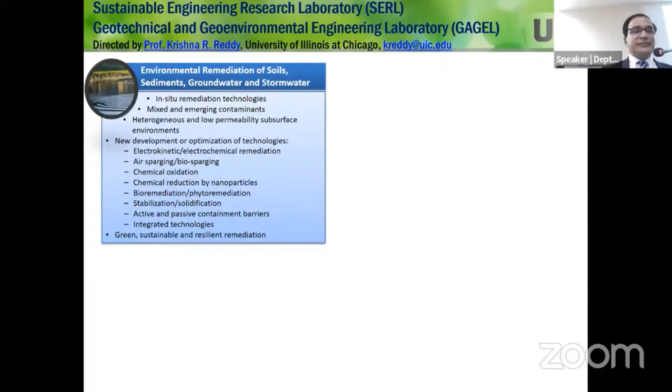So I am in charge of two labs: the Sustainable Engineering Research Lab and the Geotechnical and Geoenvironmental Engineering Lab. Just to give you an idea about the types of research I do - I do a lot of research on environmental remediation of soils, sediments, groundwater, and stormwater, developing technologies to address pollution. I also work on waste management and landfill engineering, which is the topic of my presentation today, along with many specific research questions I answer through my research. For the last several years, I've been working on life cycle assessment and sustainable and resilient engineering. In this area, I'm more interested in developing sustainability analytics. Everybody talks about sustainability these days, whether they understand what it means or not - it has become a buzzword, but my research is about quantifying sustainability. How do you quantify it? If you say your system is sustainable, how do you say that? How can I calculate the sustainability metrics and then show that?

Not only sustainability, but resiliency has become very important, and you need to think about both of them. Resiliency, especially to climate change impacts, is extremely important. So having the frameworks, once you have them, you can apply them to anything you're doing. It doesn't have to be geotechnical or geoenvironmental. It can be structural engineering, water resources, anything.

I teach a course on sustainable engineering for graduate students, and I have students from electrical engineering, chemical engineering. They come and take the course. They learn the sustainability principles, metrics, and tools, and apply them to their designs. For example, last semester one project an electrical engineer did was substation design - how do you make a more sustainable substation design?

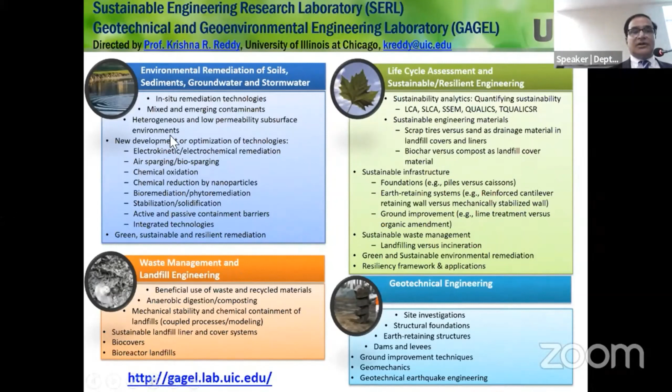My master's and PhD were in geotechnical engineering, and my undergraduate is in civil engineering. These first two topics you see, I call geoenvironmental, and this is more sustainability. I'm passionate about geoenvironmental engineering as a topic. It's not used very commonly. It's, you could say, an easy way - a combination of geotechnical and environmental.

You need to bring both of them together. But if you think broadly, it is much more than just geotechnical and environmental. You need a background in chemistry, hydrogeology, microbiology, some medical knowledge, environmental justice, economic issues, looking at the systems engineering approach, and environmental laws.

We address all these issues: environmental characterization, risk assessment, containment, remediation, waste management. To address these environmental issues, having a geotechnical background alone or environmental engineering background alone is not enough. You need to encompass all these multidisciplinary things. So I would say geoenvironmental engineering is the application of all relevant multidisciplinary background to create holistic engineering solutions - that's the problem we see. People work in their silos and aren't able to come up with a holistic solution to the problem, so the problems aren't being solved.

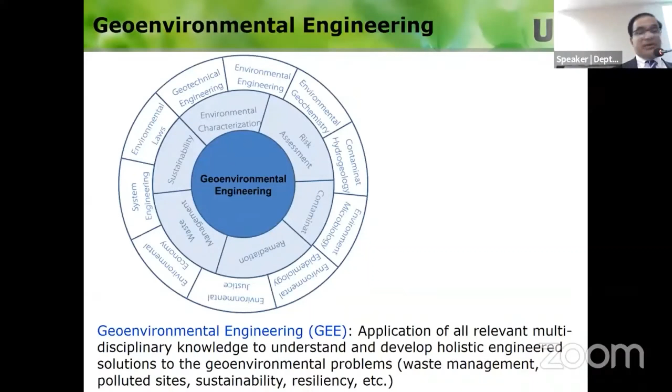Geoenvironmental problems are basically waste management, polluted sites, sustainability, and resiliency. This is a truly multidisciplinary technical approach. I really enjoy working on this one because it has a huge practical impact.

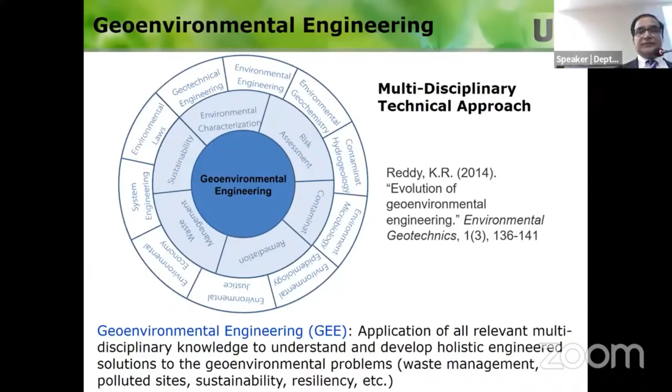If you want to know more about this field, you can read my paper. Over the last 25 years, we have been working on a lot of different aspects of sustainability and geoenvironmental engineering. We have 4 books, many journal papers, many conference papers. If you want to get into details, you can go to this website and find the information about these publications.

I want to take this opportunity in presentations to explain my research philosophy. This is very important. What we do is identify a real world problem - we really identify what problem we're facing in society. Then we come up with a research hypothesis: what could be the potential solution to the problem? And then we want to test it out, right? That's the scientific approach.

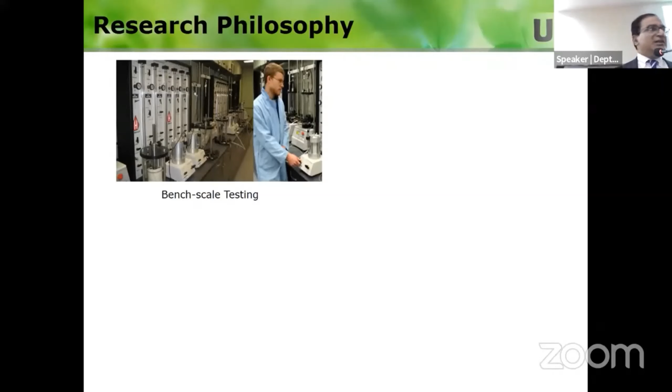So we do bench scale experiments. These are very easy, not time consuming, not expensive. We do that one. And if we find positive results, then we scale up. Everything is not tiny in experiments, right, so you need to scale up, and we do that in our labs.

Mathematical modeling is extremely important because once you do these experiments, you can understand the fundamental processes that you need to be modeling, and then incorporate all those processes into a mathematical model. Then you can scale up with the modeling to the field scenario. You cannot apply it directly from lab to field - you need a mathematical model to be able to design the field systems.

I also love going to the field and demonstrating or testing our hypothesis, what we found in the lab, because anything that works in the lab, even at large scale, may not work in the field. So if it doesn't work in the lab, you don't need to go to the field - you don't have to spend the time. But if it works in the lab, then you want to go out and see if it works in the field or not.

I love working with the students - these are all pictures with my students. The concept I have is, we are in the university, we need to advance the fundamentals. Practitioners aren't interested in that; they're really trying to implement solutions to the problem. So we advance the fundamentals, and at the same time, we're trying to solve the real world problems.

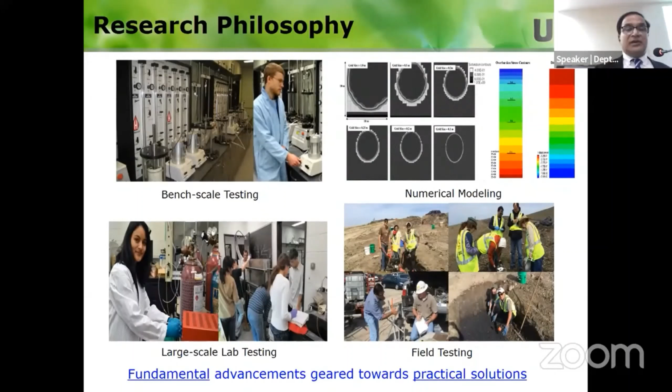So that has been my motivation for doing any project that I do. So the students get excited that we are trying to solve a real world problem, and then we need to do that on a fundamental basis.

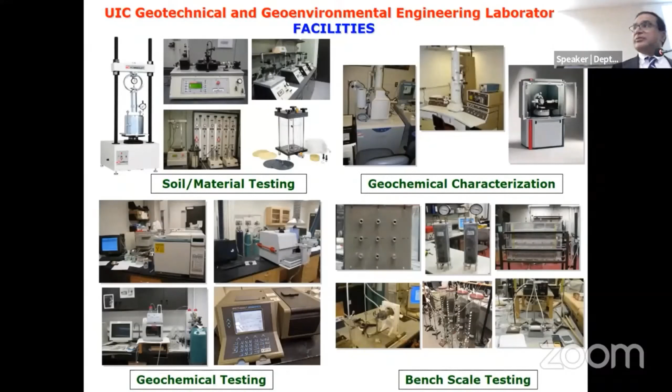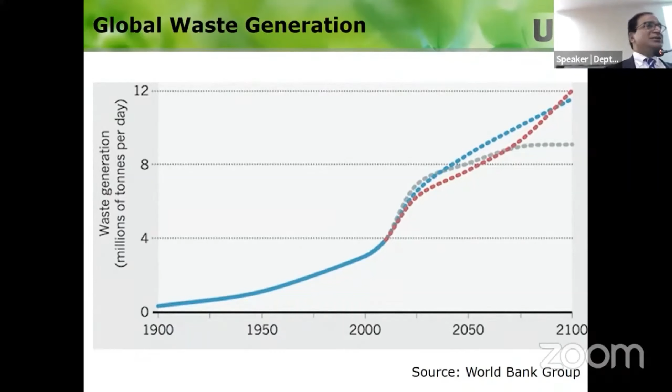If you say that we have all this waste dumps problem, then think about what we're going to do when the waste is doubled and tripled. And it's not just in India; all over the world, the quantities of waste are increasing. The simple reason is population increase. The population is increasing everywhere, and as a result, the waste per capita is increasing. So this is going to be a huge problem as we go into the future.

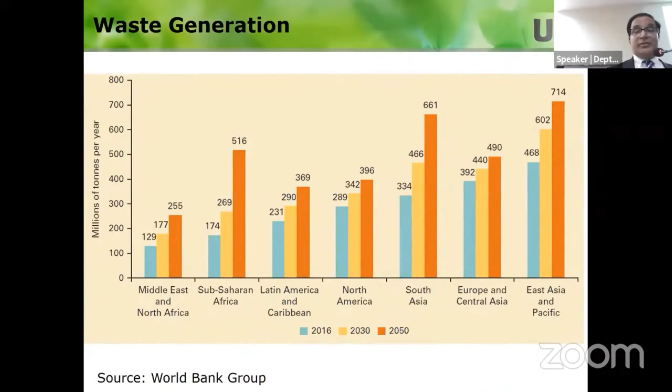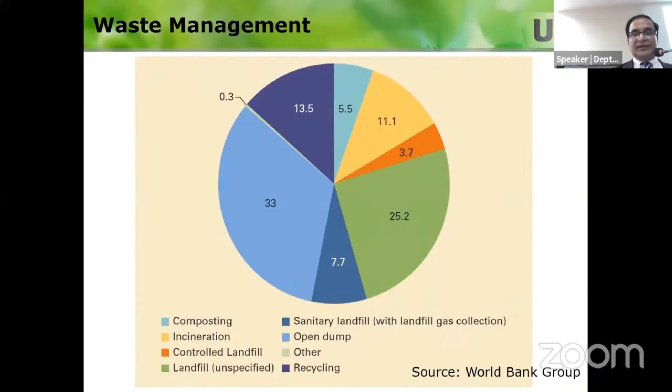Globally, if you're looking at World Bank information, composting is done, incineration is done, controlled landfilling is done, but a lot is in open dumps and some recycling is going on. But most of the waste is being dumped in open dumps or uncontrolled landfills that are not operated properly. They call them landfills, but they are actually not landfills.

So all the countries have realized that this is a huge problem. You have environmental agencies. In the US, we have the US Environmental Protection Agency. They are after protecting the environment and are supported by taxpayers' money. They have guidance on what needs to be done in terms of regulations and also enforcement activities.

In India, you have the Central Pollution Control Board. I always tell people that the first thing you need to look at is what regulations are being proposed. And unfortunately, the regulations are there and practice is different.

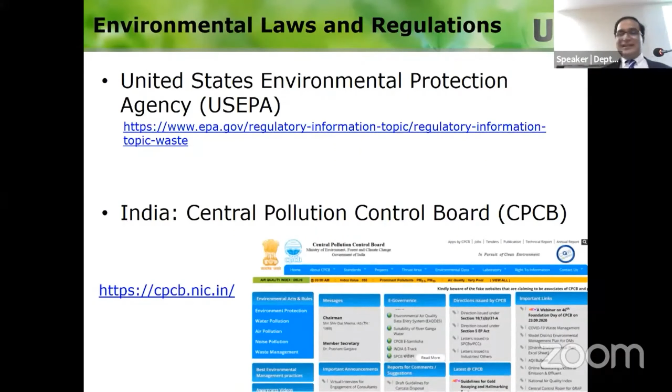So you need to understand all these things. Even though I may be working on landfills, you need to think about what are all the other things that can be done. So at the end, I want to come to this conclusion that one thing is not going to solve the problem. You need to have a combination of these things. So that's the message I'm going to end up with. Okay. So the problem is, people are looking at, okay, this one solution or one approach is going to solve the problem. That is not the case.

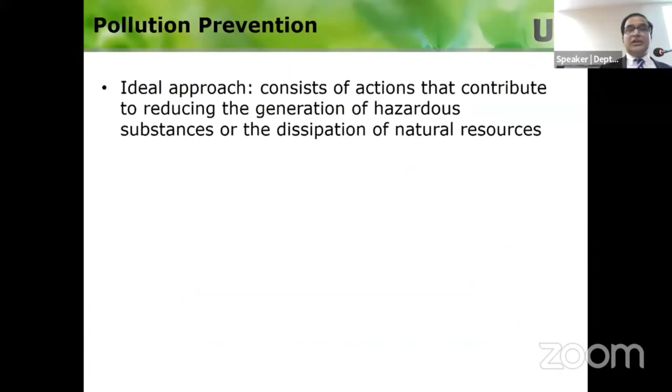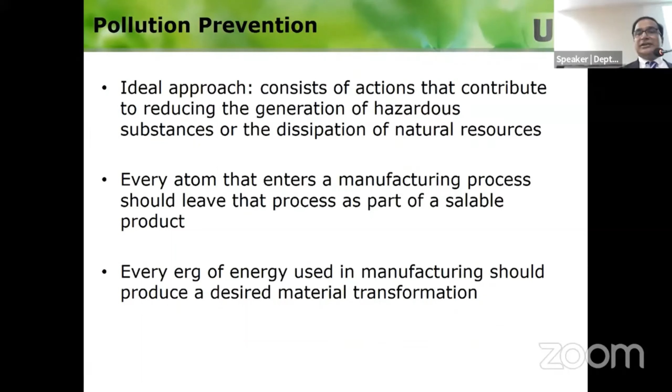So pollution prevention is, first of all, you don't want to create the waste, right? Basically, how do you prevent creation of the waste? So you have to look into the manufacturing, what materials and what processes you are using, so that you're not really generating the waste. There are a lot of things that you can do, from an environmental point of view, or also from a sustainability point of view, using less reagents, less toxic chemicals, minimizing the energy use, using a lot of renewable materials and so forth.

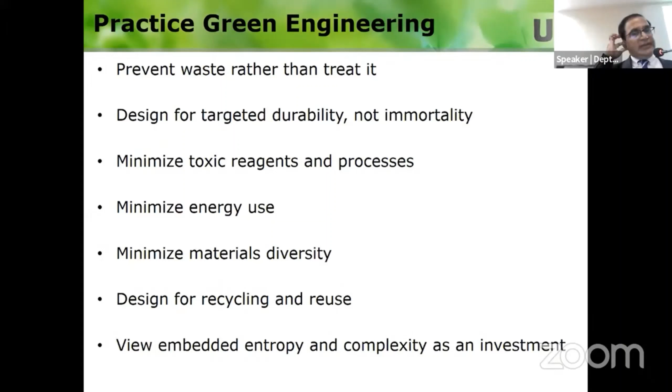So this is practicing green chemistry, using materials that are green. And then there's a green engineering concept. Sustainability is beyond green engineering, but in green engineering, you try to do these best management practices so that you don't generate the waste. So that's the one thing. And this requires thinking. You have a process to follow right now, but what are the alternative processes that you can think about? So that kind of awareness should come.

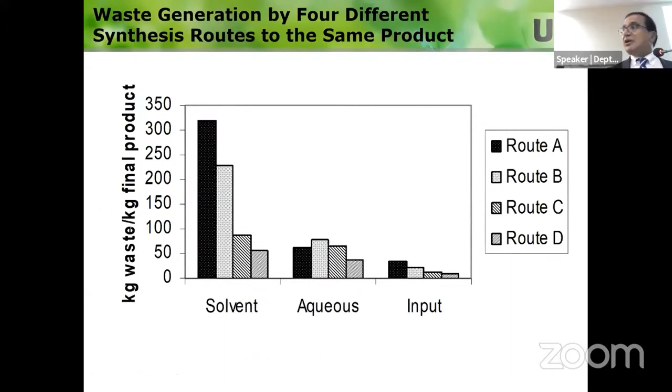So, how much solvents I'm using in a process, how much aqueous solutions, how much input I have, and then how much waste I'm generating. So these are 4 different processes that I can follow to create the same product, but you want to use the one that is going to produce the less impact. So this has to come from the manufacturers.

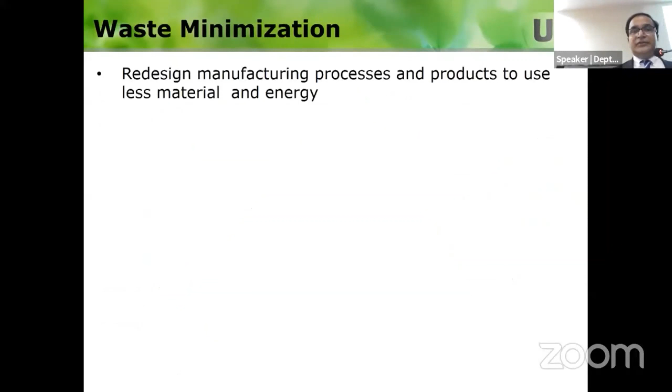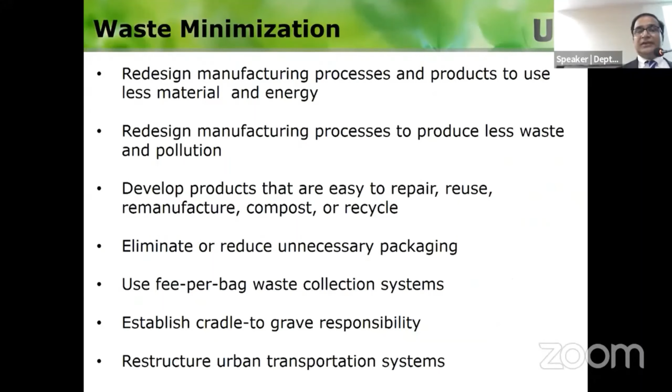So now move to minimization, right? If you cannot prevent it, try to minimize as much as possible. Again, this falls into the hands of the industry that manufactures a lot of these products, and they need to do a lot of things in terms of redesigning their processes so that the waste is minimized. So if you cannot prevent it, minimize it. If you cannot minimize it, then at least the waste that you generate, can you reuse it? And this is where a lot of efforts are being done. So you reuse, clean, and use the materials over and over again.

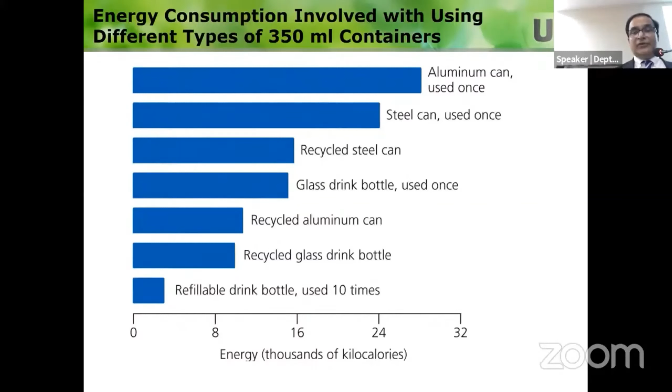So what are the advantages of this? For example, if you have an aluminum can, right? To make that aluminum can, you have to use so much energy. So if you recycle, you are conserving that energy, right? It's obviously a very simple concept. With all the materials, when you recycle, you are avoiding the energy to make them new instead of recycling.

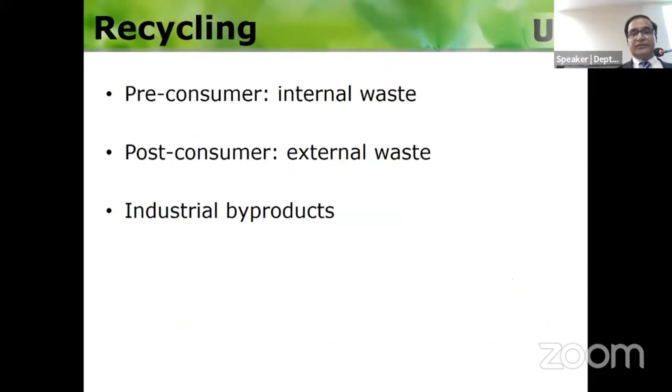Reuse is just using the material as it is, and recycling, again, can be pre-consumer or post-consumer. Manufacturers can use internal waste, and post-consumer is kind of external waste, and a lot of industrial byproducts are there. In the US, we have these material recovery facilities. All the waste goes to these recovery facilities, and they sort it out. In some countries they have a dozen different bins, and they ask people to sort it out. But in the US, we have only 2.

One is non-recyclable waste, and the other is recyclable waste. The recyclable waste goes to these MRFs, as they call them, and there we use technology and personnel to sort it out. One of the problems with recycling is that we used to ship everything to other countries like China, the Philippines, and other places. But now they are not accepting our recycled material. So the problem is, if you recycle and you don't have any uses for it, it's becoming a problem.

The piles of these materials are lying out. So think about it. You want to recycle it, but at the same time, you need to think about whether that recycled material is going to be used or not. Because in the US, we have piles of these recycled materials. They are becoming a nuisance. It would have been nice not to recycle them.

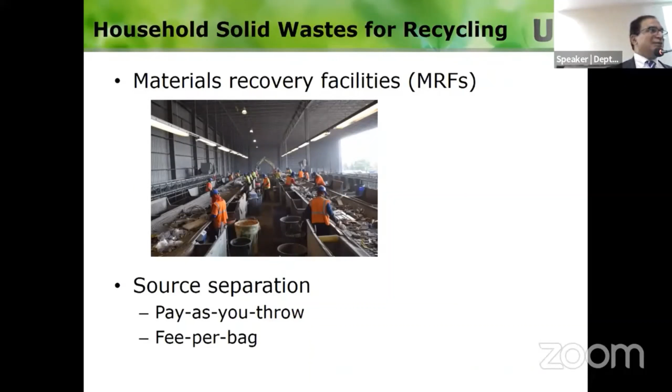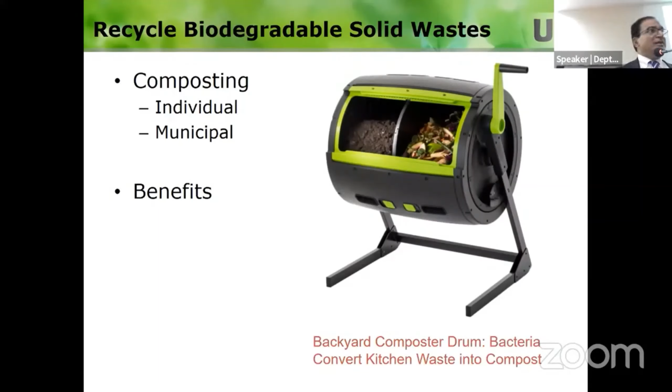And then a lot of people in the US are environmentally conscious. Food waste is one of the things whose disposal can be easily avoided. So composting is done. So I'm showing this picture. You can go to a regular store and buy this one. At Walmart, you can buy this one for less than $100 or $200. And then you can put it in your backyard, and whenever you have food waste, put it in there. And it creates nice compost, and then you can put it in the backyard, and a lot of people do that.

There are many uses for recycled paper. Recycled paper is not a problem. There are many ways that recycled paper is used. The plastics, some of them can be used, but a lot of them cannot be recycled, and they end up in the environment. They pose a lot of problems that you are aware of. Beaches and all different places it comes out.

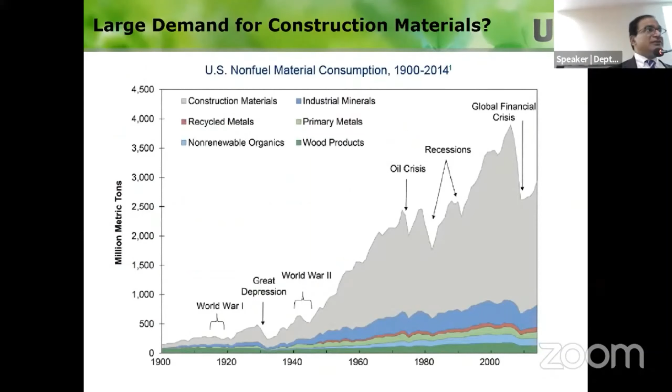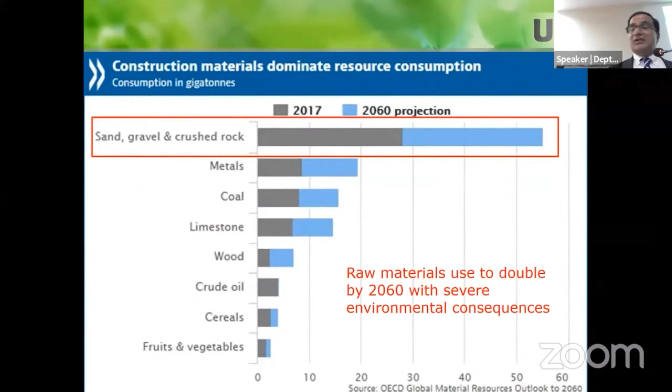And recycling is very important in civil engineering. For construction, we use a lot of materials. The construction industry uses a lot of materials. And if you look at the demand for construction materials going into the future, the demand for sand, gravel, and crushed rock is going to double by 2060. I mean, you have seen construction everywhere, right? And we are running out of sand, and you're already experiencing it in a lot of places. So how do you deal with these things?

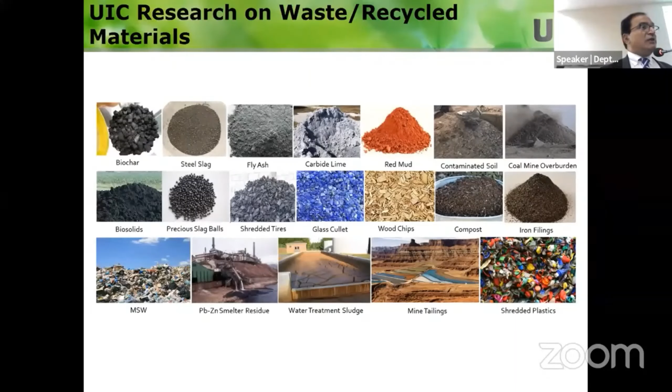So you really have these waste materials that can be reused for construction purposes, okay? Construction has to continue, and you don't have those natural resources. So the only thing that you have is these recycled materials. So we do a lot of research in our lab. For example, I showed you the pictures of these different types of materials that we worked on in my lab. One thing that I want to mention is there are a lot of other people all over the world working on reuse of recycled materials. But the problem is they just do some characterization studies, and they don't take it all the way to the end application.

So you really have to follow this kind of protocol. You identify what materials and what applications, and then you establish the lab testing methodologies, because standard testing methodologies that have been used for soil and concrete may not be useful, depending upon the material that you're dealing with. You need to establish the testing protocols and do the tests, and then look at the results. Are they applicable? If they are not applicable, then don't give up. Maybe there's some modification that you can do, and then make sure that the material meets the requirements and the approval requirements.

And in this testing, not only the mechanical properties and hydraulic properties, but also the chemical characteristics. One of the main things is leachability. A lot of these waste materials might have contaminants. So when you have rainwater or something, if they are leaching all the contaminants, that is going to be a huge problem. That also needs to be analyzed. And then you do the field demonstration, create the specifications, do the sustainability assessment, and then make it guidelines for people to use it extensively. So you have to follow all these steps.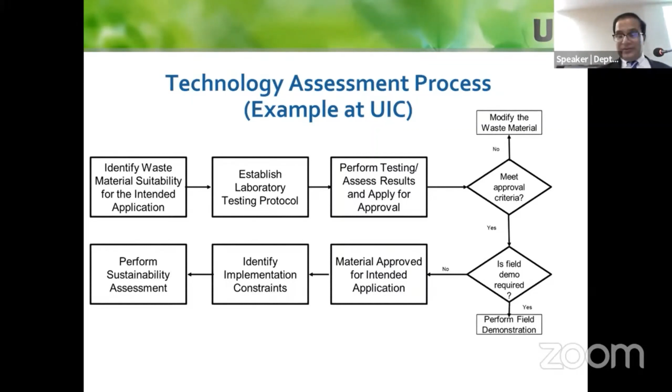I see a lot of people working on geotechnical characterization or chemical characterization, and not bringing all that knowledge into field application. So that's the thing that you need to provide. And there are a lot of barriers for recycling, and upcycling is actually branding the material as something that is going to perform better than any other alternative materials that you have for that application. Public awareness, policy and regulation issues, market issues, logistical issues, these are going to be a huge challenge, but some materials are now being accepted in construction very easily, and there is a shortage of those materials. So a lot can be done by civil engineers in different disciplines.

Energy recovery is one thing. In the Indian context, there's a lot about having waste-to-energy plants and making all the waste disappear.

All these waste dumps disappear overnight, right? I don't know, maybe I'm dramatizing it too much, but I hear in the news that having waste to energy plants is going to solve this waste problem.

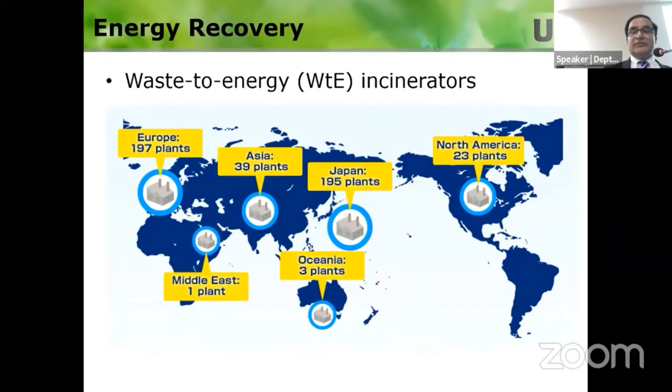That's not the case. I'm giving you examples of these waste to energy incinerators, but in the US the number of these are going down extensively, because first of all, waste has to be conducive to burning. If you have too much water or too much inerts, it's not going to be good. It has to meet the requirements, it has to have a caloric value, and if you don't have it, you cannot get any benefit out of it. And then you get ash out of this one.

So that needs to be managed also. Ash will have a lot of toxic metals, so you need to think about that one.

And with that case, but you need to, in Europe they use these things. It's not anything new. In Europe they use it because they implement the technology to control the emissions. It's going to cost a lot of money, but the technology is out there.

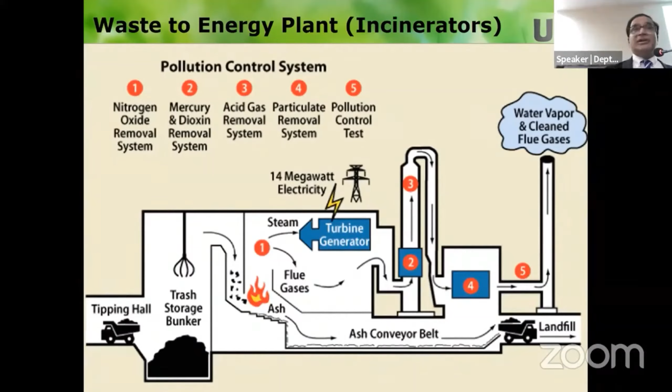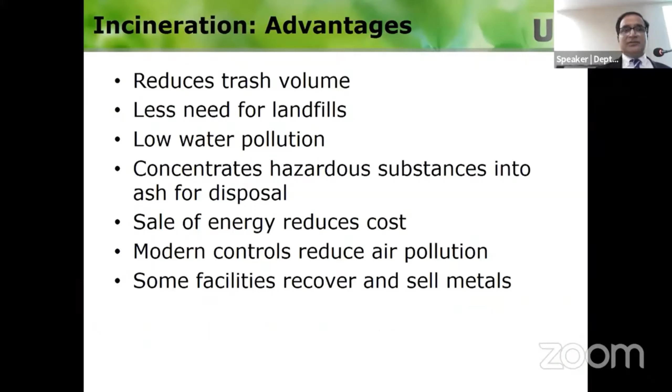So there are a lot of advantages. Just want to mention this in terms of incineration - waste to energy is basically incineration. It reduces the volume, you don't need landfills, low water pollution problem. So all these things, there are benefits, but at the same time you need to look at disadvantages too.

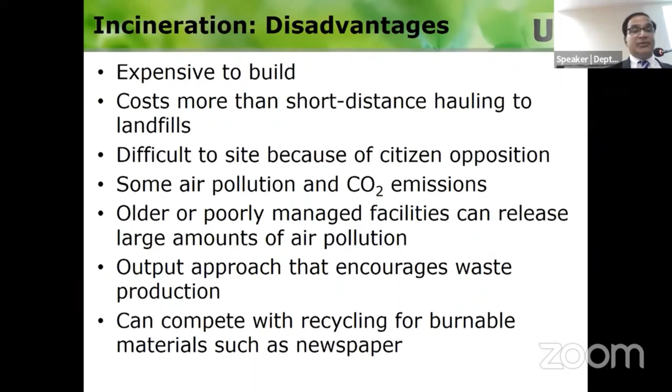So this is not easy. There are a lot of shortcomings, especially making sure that your waste is conducive to burning, and also looking at the emissions, in addition to high costs of these treatments.

And then I found newspaper articles that there is an air pollution problem by these waste to energy plants in Delhi, and there are protests about this.

So as in the opening remarks, Professor Venugopal sir mentioned that you need to think about 3 things. Even Professor Devagowda also mentioned that we need to think about soil, air, and water - this contaminant transport. You have to see this holistic system, because if you transfer the contaminants from one phase to another, solid to liquid or solid to gas phase, that's not going to be solving the problem. So you need to look at everything holistically.

So the last thing is disposal - open dumps, right? We don't have any open dumps in the US. If you have to find an open dump in the US, it's impossible to do that. But there are a lot of things in India, right?

So I got pictures of these dumps in the newspaper articles. I subscribe on Google News to Landfill, so I get a lot of news about landfill situations, dump site situations in India. I get to read the news articles, and whenever there is a photograph, I grab those things.

So the slope instability and failure - everybody who has taken soil mechanics and geotechnical engineering knows slope stability, you have to maintain it. You cannot have vertical slopes. So when people are dumping, they dump without any proper slope. There was a case in Delhi where it slid, 2 people died. In other places people live right at the toe, and a lot of people, hundreds of people, got killed.

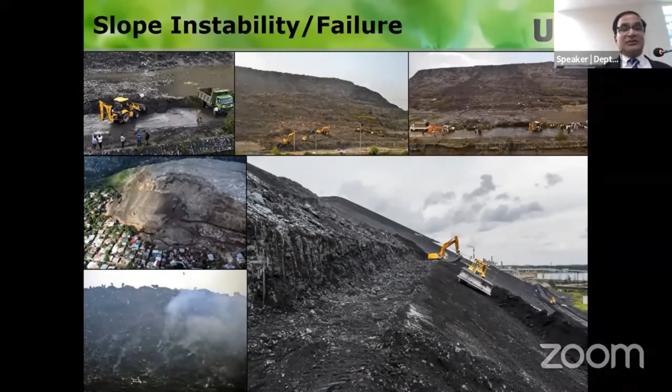The other problem is toxic gases and odors, right? In the US, we have at least control on what goes to a landfill, but in India everything goes there - even hazardous waste probably goes there too. And in the US we generally have methane and CO2, but here you could be having a lot of toxic gases coming out. It's not just methane and CO2 or H2S, but a lot of these toxic gases.

And you've seen this news recently, right? Even the landfill in Chennai had a fire, and one in Delhi - they keep burning, and burn like 3 days, 4 days, they extinguish it, the problem subsides, and then it comes back again.

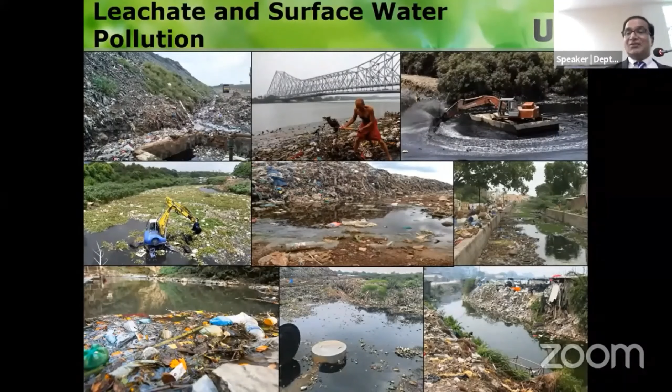This is really bad. And then leachate. All the water that falls on the waste is going to come out, and it's going to contaminate the rivers, lakes, all the things. And that leachate has a lot of toxic stuff. If you are taking water from those contaminated waters, it's going to be a problem.

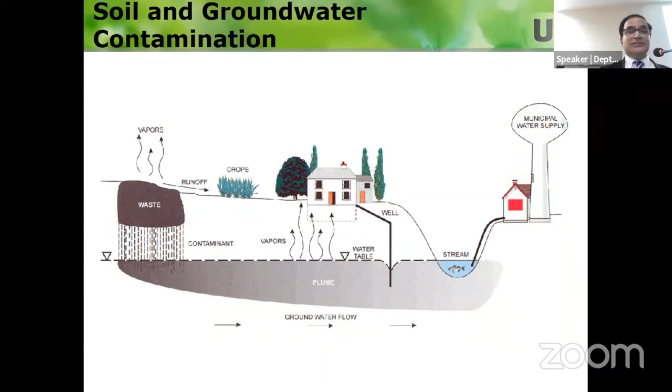The problem that you don't see is that a lot of chemicals get into the groundwater, and then it passes through in the ground flow with the flow of groundwater, and you have contaminated groundwater. If you have a drinking water well in that groundwater, you may be drawing the contaminated water. So you need to really think about this, and then if it's a river, it could be entering the rivers and polluting the fish and other things. So it's going to be a huge problem.

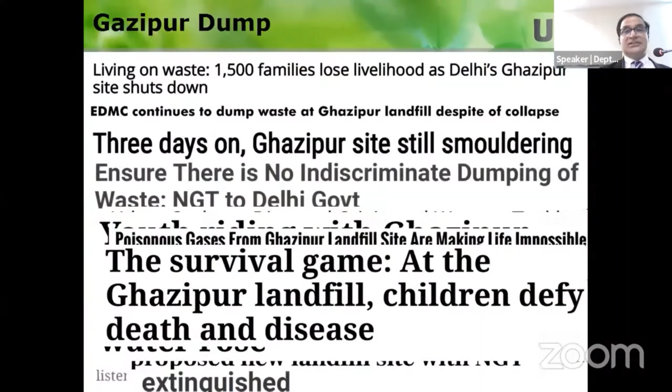One thing I really feel sad about is the people living around these dump sites. I know in Delhi they are right next to these dump sites, and some of them work as scavengers. That's their livelihood, and there are demonstrated studies on the very bad health of these people. I think social injustice, or so-called environmental justice, is extremely important in this kind of case. There are a lot of newspaper studies on this too.

So what are the regulations? I just looked at Indian regulations, Central Pollution Control Board regulations. They tell you about reduction of waste by biomining and waste processing, followed by placement of residues in a new landfill or capping. So I don't understand what this biomining is, how do you process it, and how you use the residue. And if the residue is contaminated or not.

But in my view, this is quite challenging. Biomining and handling of the residues is quite challenging. That is not what we have done, it's the capping. And even Indian regulations say that capping is an option. The capping basically means you put a cover on top of it. So these are the regulations, you can find it in Central Pollution Control Board information.

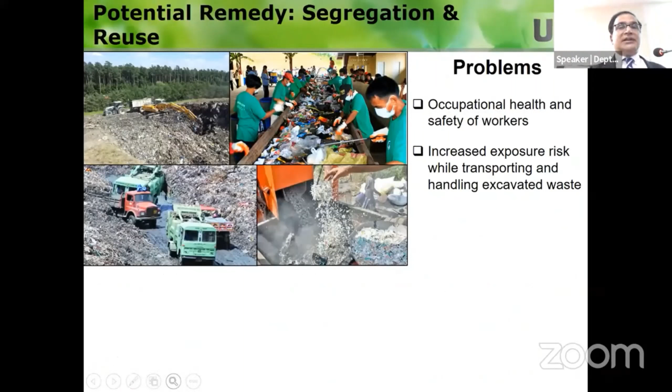So what can be done? What can we do for these dump sites? I want you to think about what is the solution to this problem. So one of the solutions is this: can we segregate and reuse? This is one option. I'm going to go through several options that you can have, and you need to think about it.

This problem is going to persist for a long time, and it's going to become even worse. A lot of civil engineering students now, in the future, if you want to follow an environmental career, will have to address these legacy dump sites that we're going to have. So one option is, why don't we take equipment there and try to sort it out? There are a lot of issues with this one. It's not easy, and you have to think about the people who have to work on this segregation, and what is the value of the segregated products?

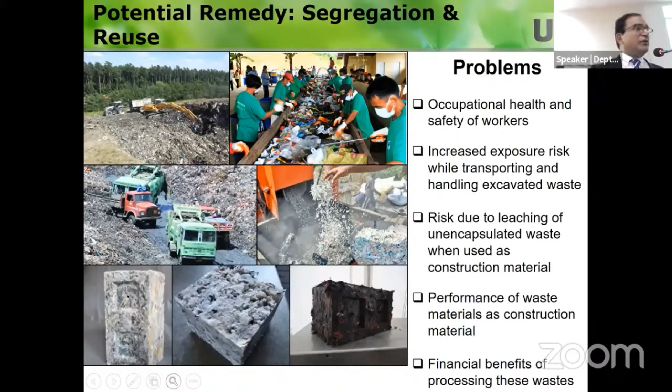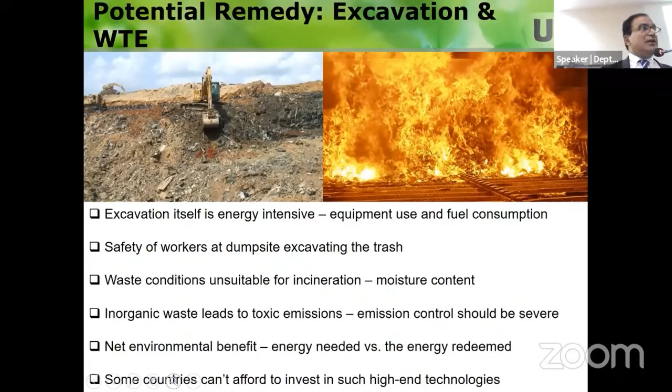The other thing is, can we excavate and incinerate? That's the big thing, and that's what's being proposed. But that's also not a suitable solution because the waste conditions are unsuitable, as I mentioned. And then you have toxic emissions. What is the net environmental benefit? We have to use energy to burn it, and you're going to recover some energy, but what is the net environmental benefit of doing this? That's another issue, so this is also questionable.

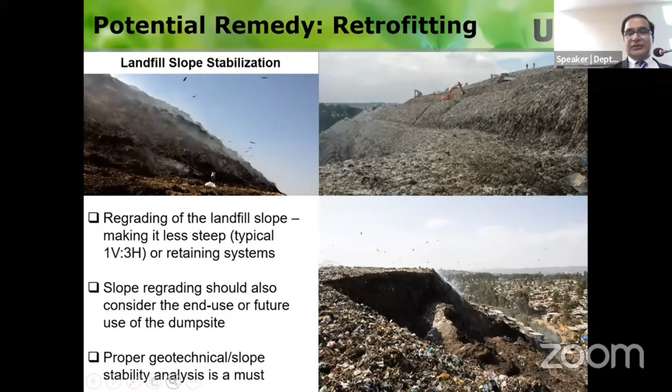And then, why don't we retrofit landfill slope stabilization? This is kind of easy, so you can create the geometry that you want so that you don't have problems of slope stability. And then you need to look at landfill gas collection, because when the waste degrades, you get a lot of methane production. And that methane production, if you have some igniting source, is what causes the fires. The fires are due to these methane gases.

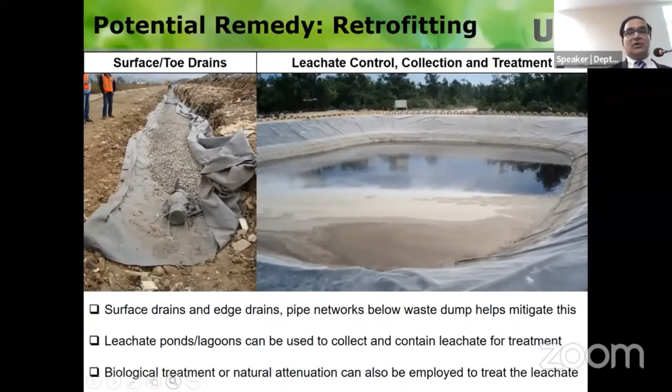So you need to have gas collection systems. And then the leachate I mentioned, you need to have a certain way to collect that leachate, because if the leachate goes into the neighborhoods or contaminates the groundwater, that's a problem. You could do things like toe drains or leachate control, collection, and treatment systems. You can put these systems in place, but then you're still dealing with the waste.

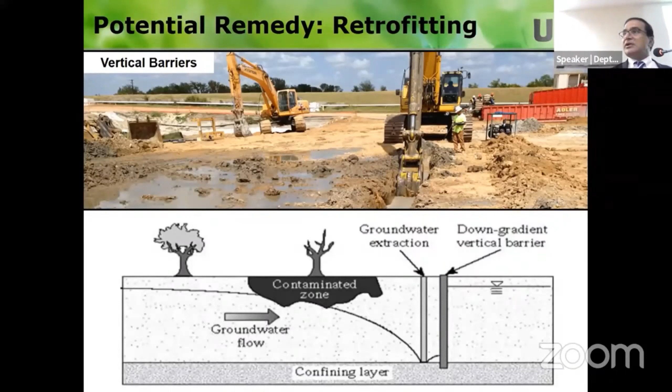What about contamination in the subsurface? If the groundwater is contaminated, we have a technology called vertical barriers, or slurry walls. These can be constructed—yes, it costs money, but as Professor Duragowda said, India is not poor, so we can spend some money and build these things to benefit future generations. You dig a trench and fill it with impermeable material, and contaminated groundwater does not pass through it.

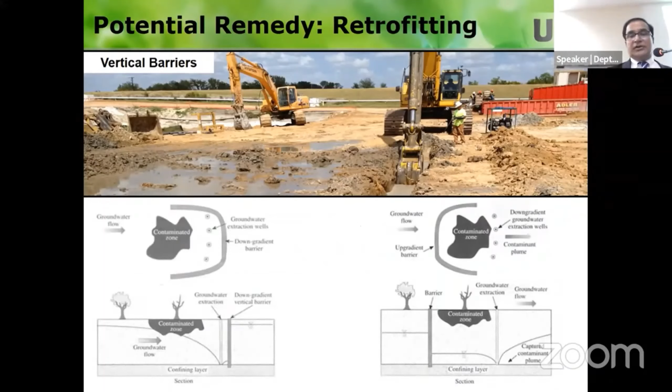Or this can be arranged horizontally. That wall can go all around the waste, or can be down gradient of the waste. Or you can pump out the groundwater and treat it. This is a little bit expensive, but using biological methods is much better, so you can use bioremediation of the contaminated groundwater.

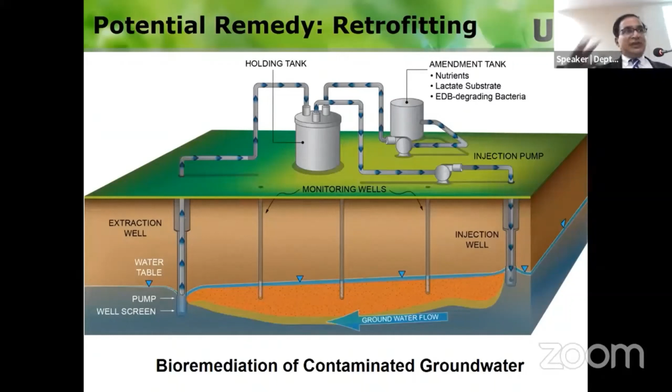So I'm trying to think about the solutions to the dump problems—what can you do? You have to deal with the waste that you have, and then deal with the contamination at the site. Or there's another solution called the permeable reactive barrier. You put a trench, but with permeable material in it, so the contaminated groundwater passes through it and gets cleaned up.

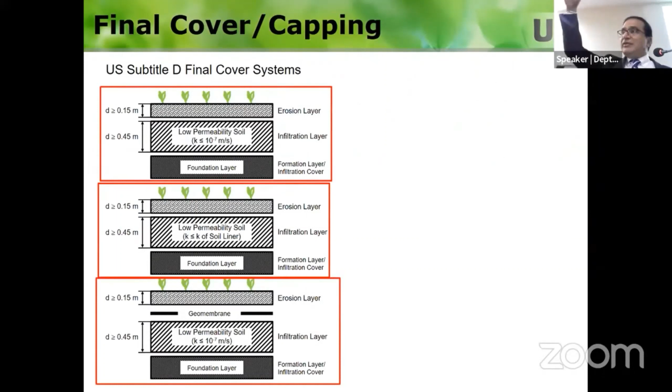The other thing is, once you have the waste, you have to put something on top of it. Otherwise it looks ugly, and whenever it rains, the water goes through it and becomes contaminated groundwater. There are multiple options for covers—you don't have to make it a very expensive cover system. You can do research and develop a more sustainable cover system that doesn't allow infiltration of precipitation and also doesn't allow escape of gases.

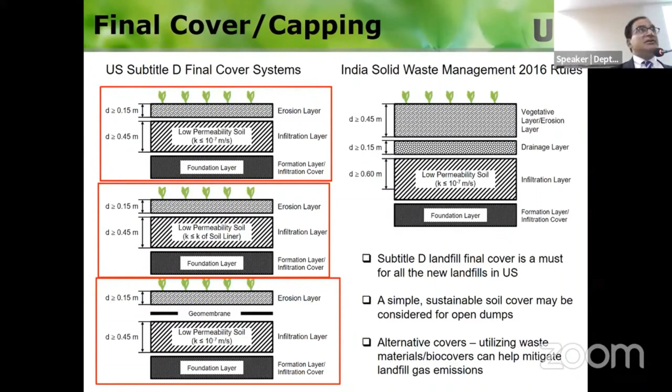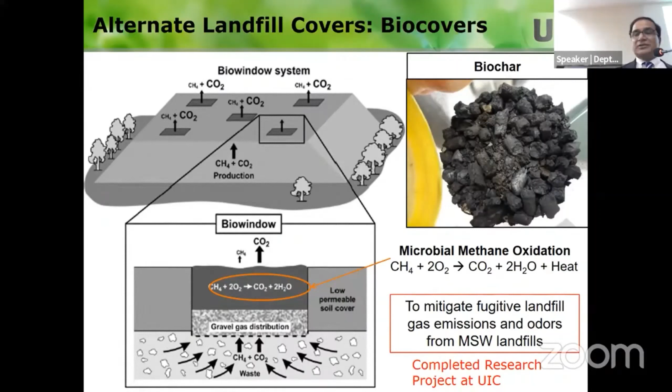Civil and environmental engineers, or geoenvironmental engineers, can do these things. As I said, we can think outside the box. A lot of sites don't have geomembranes or soil available, and these sites are really big. Maybe we can use some of the waste materials in cover construction, making a sustainable cover system—solving the environmental problem of the dumps while using waste that otherwise would need disposal. One such project is biochar, which comes from bioenergy production of biomass.

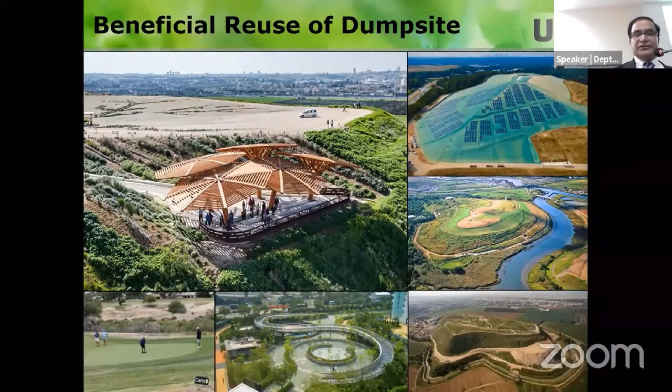Once you close it, what can you use it for? As I said, we don't have dump sites—all the dumps have been closed in the US. Even new landfills, we close them, and the land is not idle. We create parks—you can see all these beautiful parks, they are old landfills. You can use these for golf courses, recreational parks, or even putting solar panels, and so forth.

So the dumps—we should not be having dumps. We need engineered landfills. Going into the future, one thing that amazes me is in the Indian context, you're trying to take away these dumps, but how much are you doing? They're mining and taking out maybe 2,000 tons per day, but 3,000 tons of new waste is coming to the same landfill. How is the problem going to be solved? Somebody should think about it. I see statements like, in 3 months this dump is going to disappear, but you're only processing less waste than the new waste coming in, so the dump is going to continue.

So for new waste, we at least need some engineered landfills. Engineered landfills are not new technology—it's very well-established. We've been using it in the US for three decades, and Europe has done it too. You need a final bottom liner, final side liner, leachate collection system, and final cover system. These design procedures are very well established, and you need a gas collection system and leachate collection system, so you're addressing the problem in entirety: waste is contained, leachate is removed, and gases are removed.

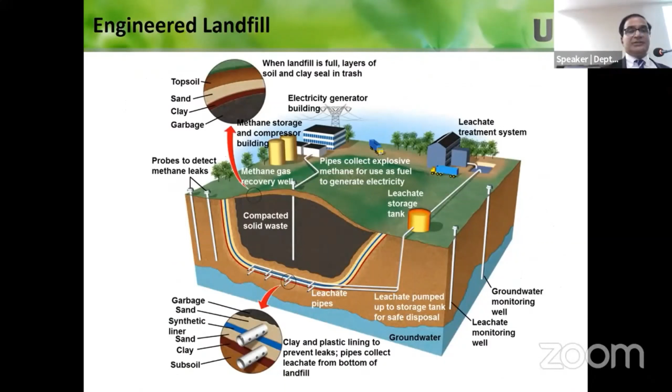So you get a good containment. I actually wrote a book in 2004, in this book I talk about the design of landfills very, very systematically.

So what I'm trying to say here is designing landfills is not rocket science. It's very well established. Whatever is being done in the US or elsewhere, you don't have to do it exactly that way, as long as you make it a performance-based criteria, not like the specifications used in the US. You need to use the materials that are locally available and make it work.

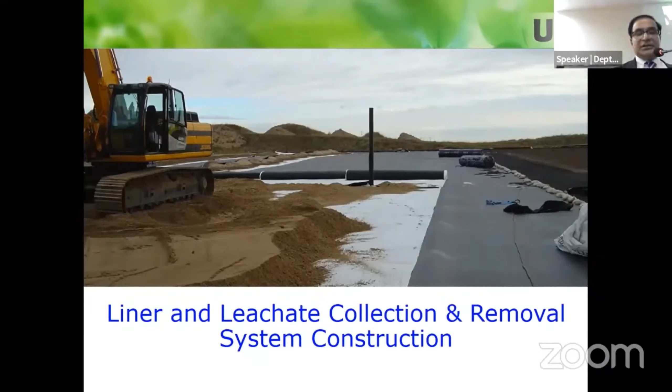So these pictures, we go to the landfill sites. I go to these landfill sites all the time, and the industry knows how to build and operate them. This is a liner and leachate collection and removal system. I love going to these dump sites. I know researchers in India who do research on landfills or waste, but they've never been to a landfill, because it's stinky, right? They don't want to even step down. I happened to go to one of the landfills, and imagine there was a fire, there was leachate, and there are cows, birds, it's smelly. It's worst case, but in the US it's much, much cleaner. So we go to the landfills.

So we have the means to do all these things, but there are still some challenges of engineered landfills. In the US, even after we design and engineer, we're trying to make it more optimized. There's a problem with slow degradation of the waste, leachate treatment, fugitive gases, sustainability. These are the things that we are addressing. So if I say that landfill design is everything established, there's nothing to work on, that's wrong—there is scope for doing research.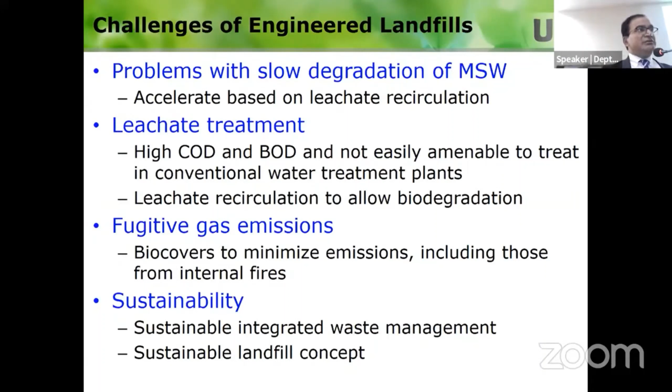So these are the kinds of research projects we are working on. I'm going to present one on leachate recirculation in the afternoon. That's a new technology where landfills are being converted into in situ anaerobic reactors—this is the bioreactor landfill, where we inject the leachate and degrade the waste really fast. I'll come to that later, and you can also do landfill mining. But in the US we don't have that many landfill mining projects; the problem is it's a very expensive process and you don't get valuable products out of it. Only in a few places do they do mining, where they want to recover space to accommodate new waste.

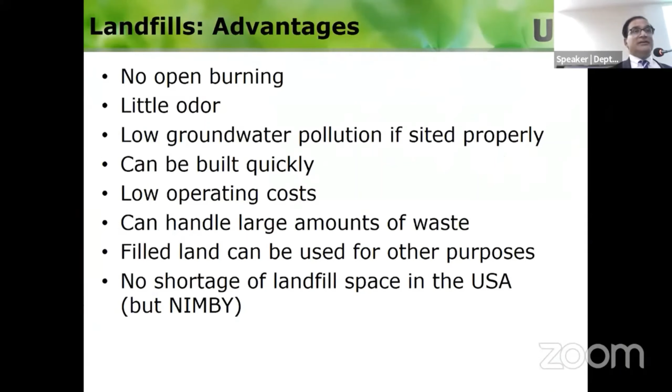So that's the other thing. The landfills have advantages. Here are the advantages—nobody wants to have a new landfill in their neighborhood, the NIMBY syndrome, not in my backyard. Nobody wants it, right? That's the biggest problem of siting a landfill. Even incinerators face a lot of opposition, but landfills have more problems than that. And there are disadvantages too—nothing is perfect in this world. So there are advantages and there are disadvantages.

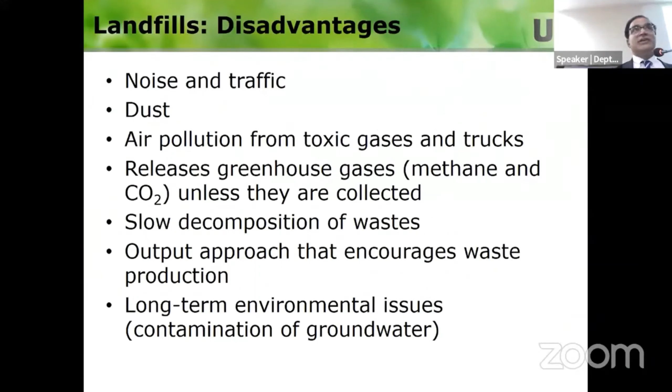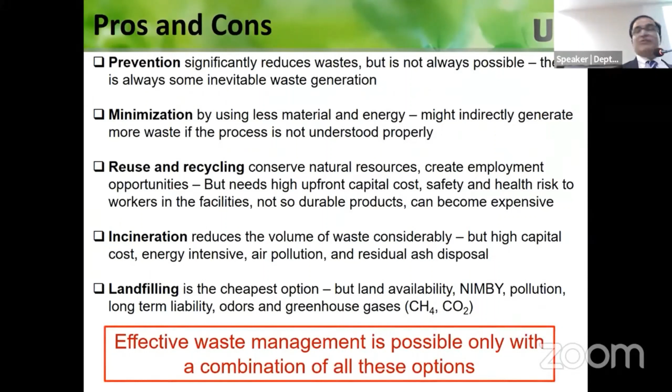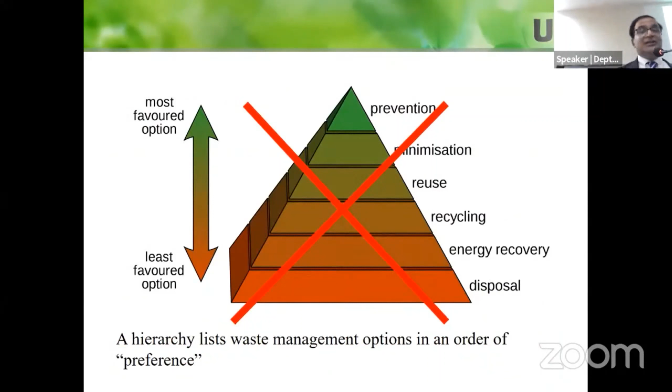So not having landfills is not a perfect solution to the problem. All these things I mentioned—prevention, minimization, reuse, incineration, landfilling—if you think about all of them, they have pros and cons. Even if you want to follow this hierarchy, we still have a problem. So the solution is we need to think about all of them in combination. I don't like this hierarchy process that you see in a lot of textbooks—this is not a good approach.

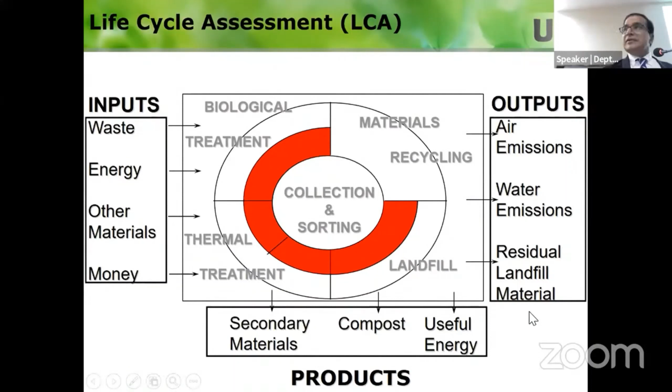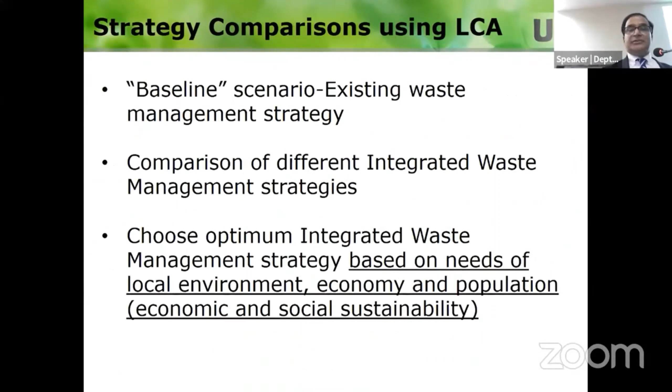So you use the inputs, and by using this assessment, you get outputs. You can assume different combinations of these options for your site, and look at this baseline scenario compared to different integrated waste management strategies: how much recycling, collection and sorting, biological treatment, landfilling, and recycling. So you can assume different scenarios, model it, and see the impacts to find which option provides the net environmental benefit.

So that's how we need to think about incorporating sustainability. It's not one thing, it's a combination of things that really depends upon the location. For India, just one solution isn't the answer. Even Bangalore could need one solution, Mysore could need another. So we really need to look at the site-specific situations.

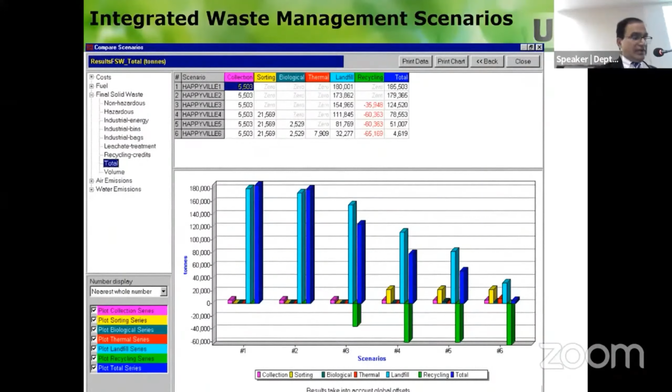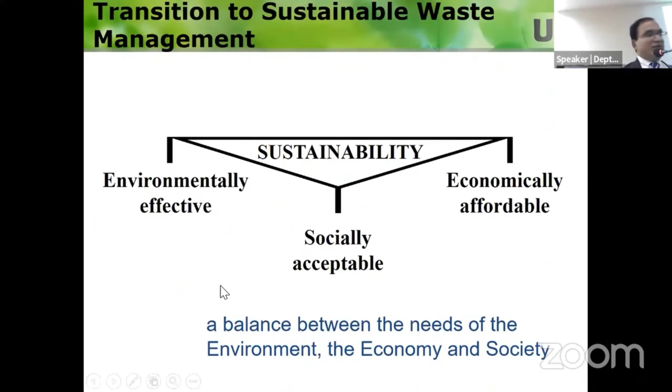So you can look at this. But sustainability through life cycle assessment only covers environmental aspects. We need to think about social aspects and economic aspects too. These are very important. This is where we call it sustainable waste management. You need to look at environmental, economic, and social factors.

So this is what I always like to promote in terms of waste management. We need integrated waste management, but we need sustainable integrated waste management. What does that mean? We have these combinations - inside you see the combination of these things. I told you, you do the life cycle assessment and see which combination is good.

But that's only looking at the environmental aspects. You also need to look at the economic aspects - how much is it going to cost. And you need to look at the social aspects. If people in a particular neighborhood are hungry, you want to provide food for them, not focus on integrated waste management and spend a lot of money on that. So you need to look at social, economic, and environmental aspects, and come up with a combination of strategies useful for a given situation.

And landfills don't have to be just dump yards. You can think of them as in-situ treatment facilities. You build a cell and treat it aerobically or anaerobically. You try to degrade the waste, and then the degraded landfill, you can mine it out and recycle it.

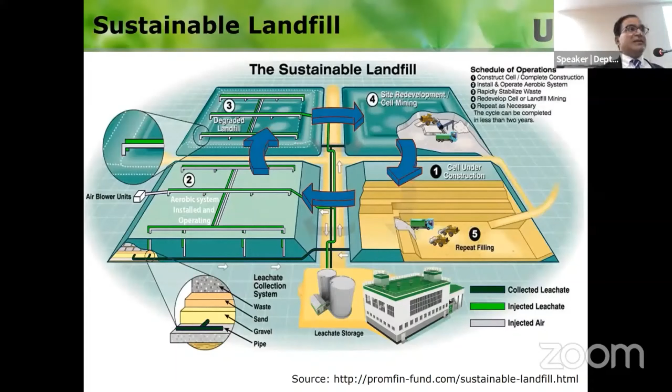Basically what I'm trying to say is, in environmental engineering or chemical engineering, you have reactors - you take the waste material in a reactor, degrade it, and recover the product. Same thing here - instead of doing it in a container, you do it in the field, degrading the waste, recovering the gas, recovering the leachate, and finally reusing the same site. So you're basically maximizing all the benefits.

So this is the last slide. I just want you to think about this option. One takeaway point from my presentation is this word.

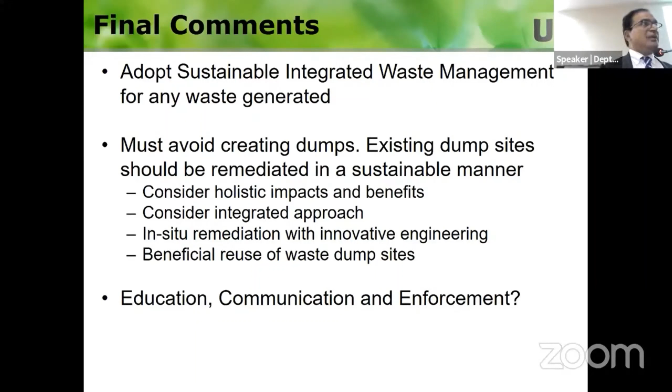Same waste management strategy as Bangalore? No, right? That's where the social, economic, sustainability aspects come into the picture. There's no one silver bullet or silver solution to this. For the younger generation, this dumps problem is going to be there, and we need to really solve it. It's sad to see in this modern era having dumps like that, and they're going to cause a lot of problems. So we need education, communication, and enforcement to make things really happen, and especially the students can make it happen in the future.

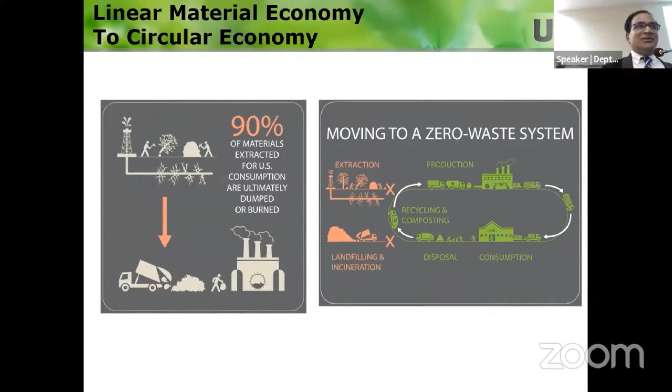You might have heard the word circular economy, but circular economy actually deals with waste management. Right now, we use materials and throw them into landfills or incinerators. This approach of reusing materials again and again, and not sending waste to landfills and incinerators - that's basically circular economy. Using materials, putting them into use all the time, and never sending them to a landfill or incinerator. This is a term you're going to hear a lot, circular economy. It's nothing to do with dollars or rupees, but it's about the circularity of the materials used.